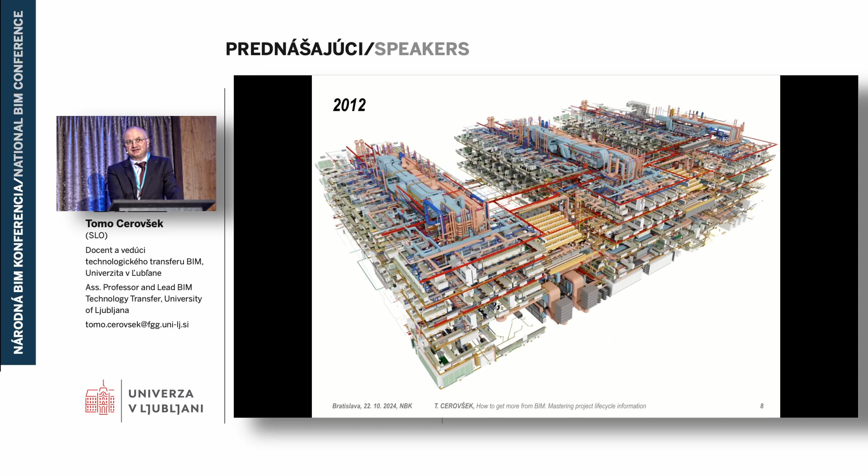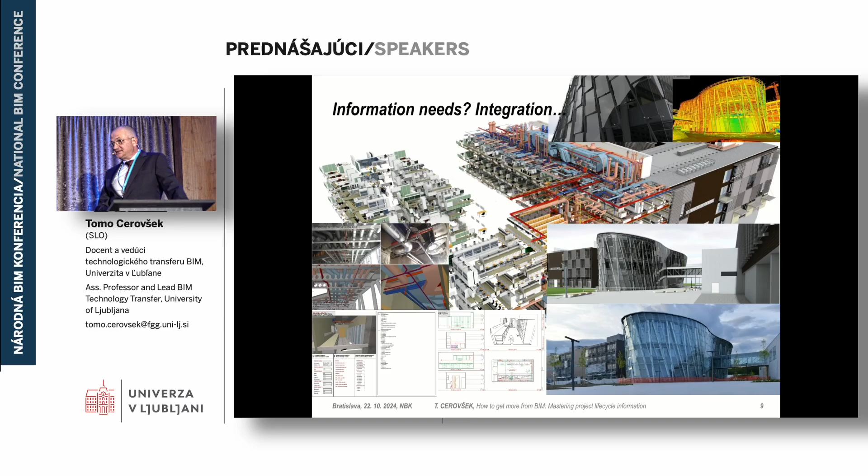And what are the lessons learned from these and other projects? It's very important how we think about the value of information for the project. Each piece of information has a little bit different characteristics, how it becomes valuable. And we are on the side to make this information really valuable. So if information that is in the model is not used, even if requested by the client, this actually has negative value.

What we can really do a lot in the context of BIM is reduce the latency. So from the moment a business event in construction happens, all the way to decision making, we can dramatically reduce the time required for well-informed decision making. We should focus on relevant and accurate information. We should also take care about information overflow. At some point, it doesn't make sense to include more information.

I remember one architect in the early stages of BIM development got quite some extra payment, and he asked the client which metadata we should include in all the objects, and the response from the client was, what are you asking? All of them. Imagine a project like this one including all the metadata from the technical sheets. So really understanding what the information need is, is essential.

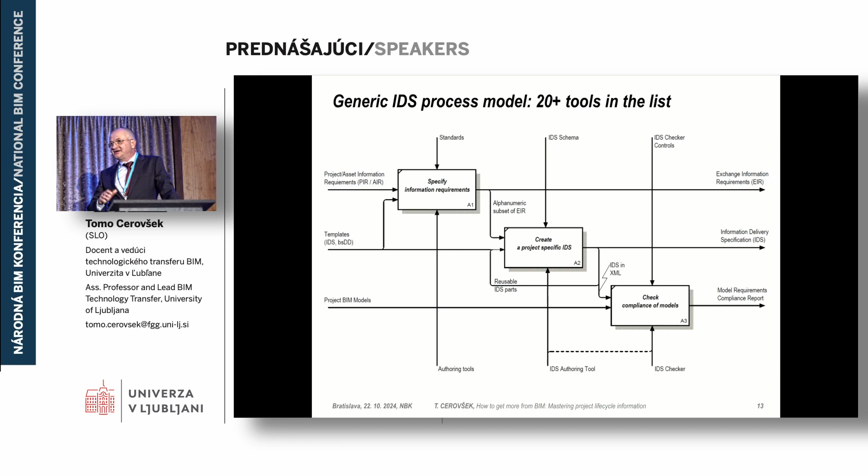This should be embedded into the process workflow, so public tenders should go for IDS definitions that allow us to reduce the cycles of information exchange, and we have many tools, I think more than 20 self-declared IDS makers and compliance checkers, and this is really a great development.

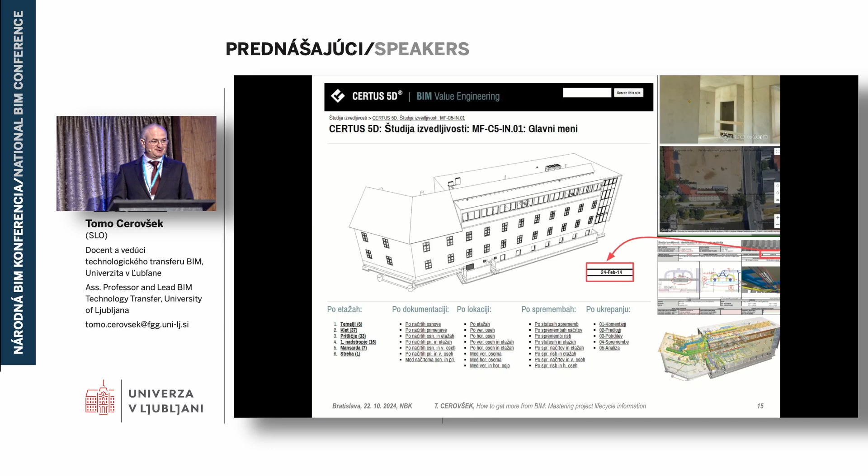If I address the second question, why BIM and AEC digitalization is needed, productivity is a simple answer, and there are many KPIs, key performance indicators, that we should observe to make advancement in our sector. Over the years, we did many interesting things. We were struggling, we were developing our own tools. Now we have a plethora of tools that we can use, and we spent quite some time on things like this. We were using heavy equipment and did manual work. Now we have utilities that allow us to do things much faster with less effort, and we integrate BIM models in a way that we can get more out of BIM.

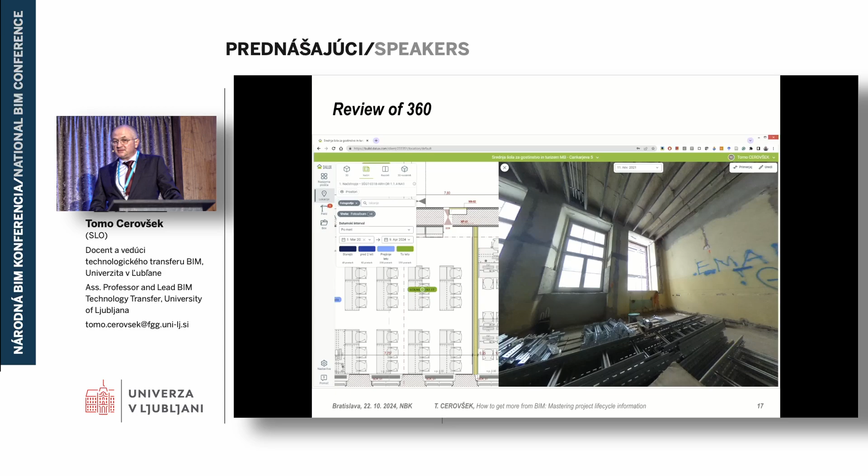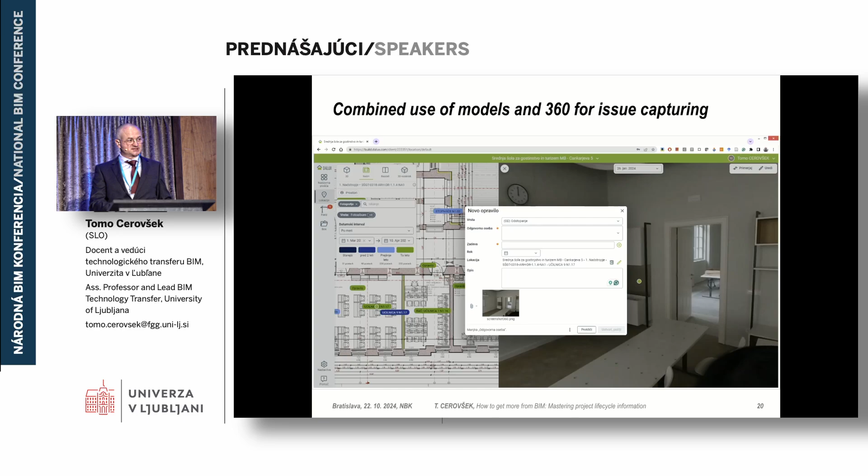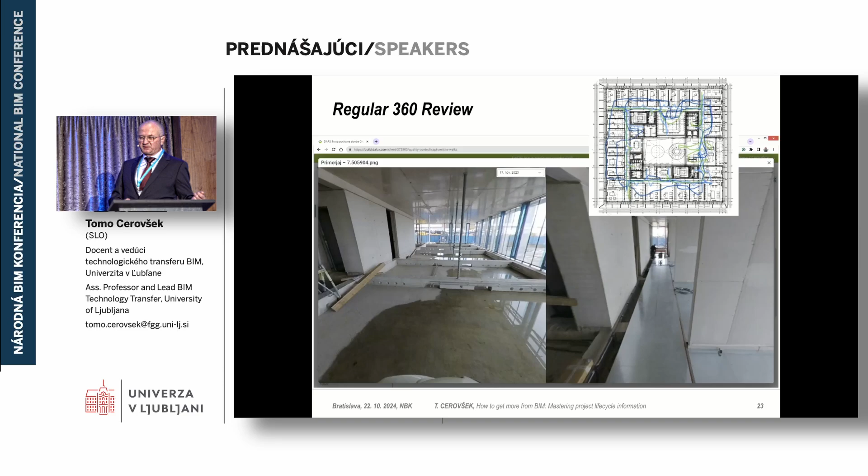This is, for example, a refurbishment project that we combine with BIM models and capturing on-site. We can track issues in a way that we use the model as a communication medium and 360 photos. We are using models for refurbishment projects so that you know exactly what was done where and when, and what on-site tests were performed, and this also helps us to streamline the contractual relationships. Lately, we are using a lot of things that were not possible in the past because of mobility and accessibility problems, and we can more easily check how the progress is aligned with the actual way of doing things.

If you look from the point of view of the Green Deal and how BIM can contribute, there are many things that we can optimize using BIM, and they are not exploited the way they should be, and digital twins will help us to monitor better and to analyze better how the buildings are performing. We will be able to better capture real-time data as well as the actual situation on site and how the building is being used. I've been at a conference and architects were complaining that they would design much better buildings if they actually knew how the buildings are used, and they would be able to adjust their way of working to the actual use of buildings. These new technologies contribute to that.

And with BIM, as we know, we have a higher level of involvement on different levels. And this is very interesting, as in the past, clients usually agreed with many things because they didn't understand how it looks. Now they have BIM, and they can really relate to it. And if that is also integrated with GIS, we have a completely different level of decision making. And this is something that is not exploited enough yet.

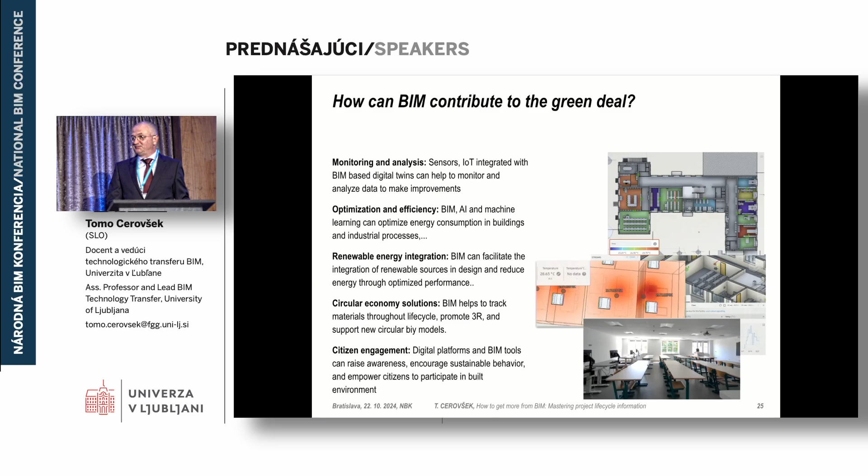So what could be the benefit in the future? We would be able to really understand how the building is used, what comfort is acceptable to the end users, and how we can adjust the use of the building to better meet the needs and the actual situation of the activities within the building.

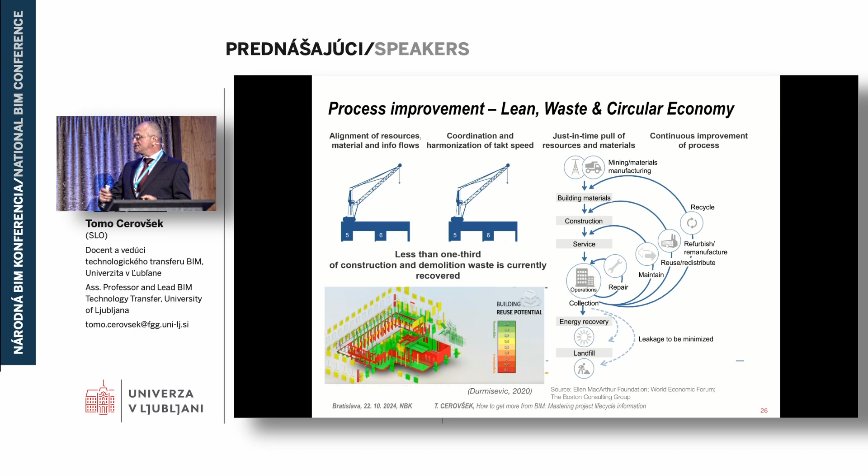From the point of view of the Green Deal, we want to reduce the impact on the environment. We would like to introduce a circular economy, and circularity is one thing that will be facilitated by BIM. And there are already tools out there that are able to assess the amount of reusable, recyclable information in BIM, what the embodied energy is, and how this can relate to digital passports that are being prepared for building products.